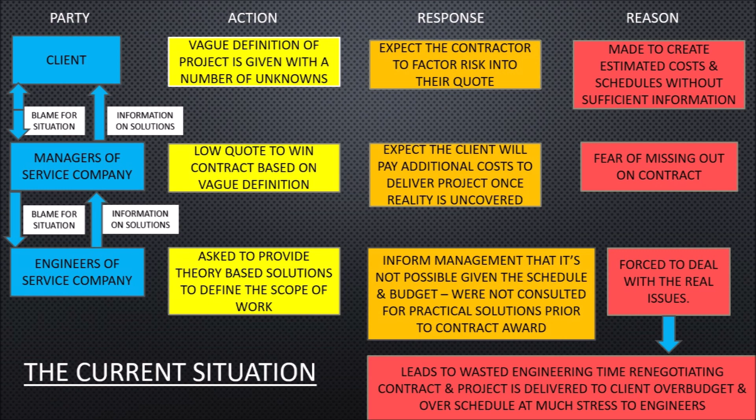We'd like to see this change, and as a result have developed a lean method of work which defines the technical scope of work at concept to deliver projects to realistic time and cost estimates. Scopes of work are based on practical solutions with construction build sequences. This requires more time in the first phase to correctly document locations of equipment, space required, and any practical issues to deal with in order to enable the works.

These details are necessary to pin down the scope of work and enable early engagement of suppliers for confirmation of equipment specifications. This method of taking extra time to work on these issues early vastly reduces the need for redesign and associated time delays later, making the following phases of work more efficient and less stressful.

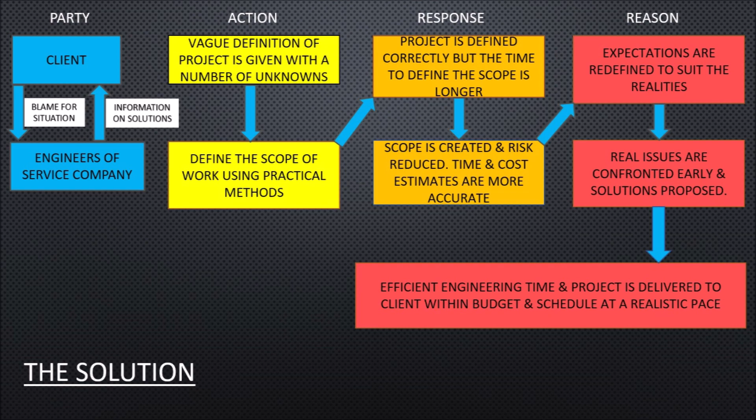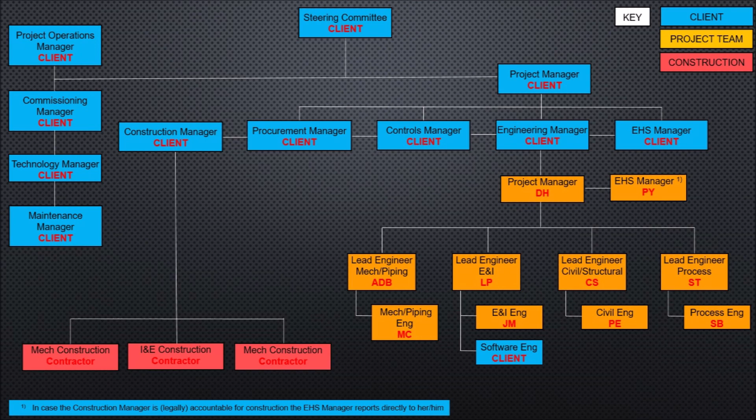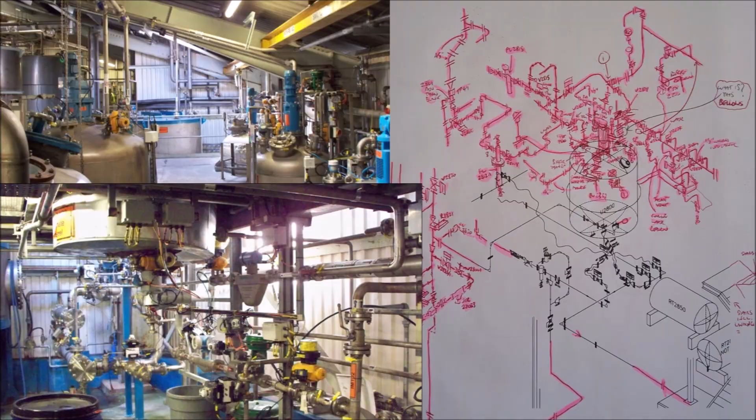Method of work. Phase 1. Concept or front-end engineering design. The most efficient method of working is to form a team which incorporates into the client's structure to make use of their on-site knowledge. Following surveys of the existing areas and equipment, isometric layouts are created. Proposed locations of equipment with physical sizes are added to the layouts, enabling the basic process calculations and other discipline parameters to be defined.

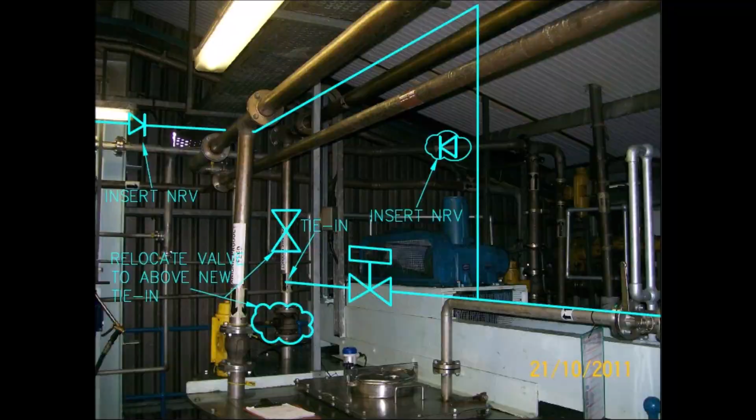For brownfield site surveys, the identification of existing services for extension, including power supply and instrument air, are also recorded. The physical representation of real-world information is incorporated into the initial design, forcing early solutions. This information enhances the understanding of work required for more practical process logic diagrams and written descriptions of the scope of work to outline stages of work in order.

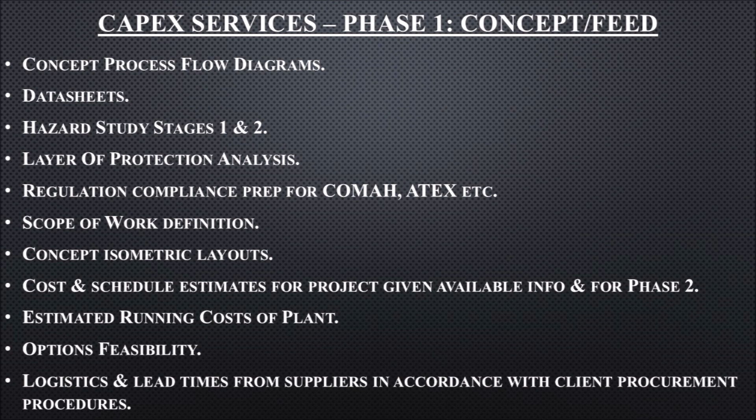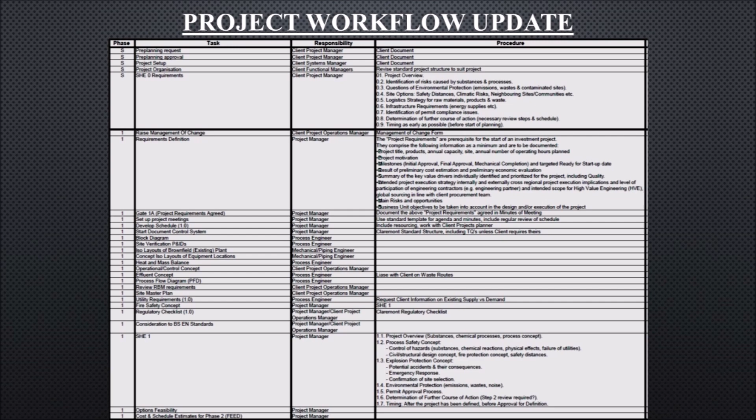The end of this phase produces a pack with technical information, layouts and process flow diagrams, along with time schedules and costs, to 30% accuracy given the available information and estimates of Phase 2. Design. Upon agreement of cost, scope and time schedules, the project workflow is tailored to suit project specifics. Building on Phase 1, the engineers advance the content to narrow the scope of work.

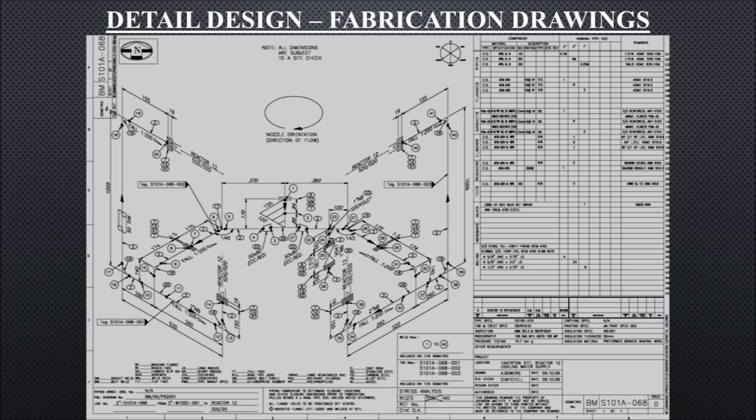These higher level details assist layouts, the construction sequence and P&ID process reviews, along with practical fabrication and installation information. Each discipline combines their work to produce equipment datasheets along with the mechanical, electrical and instrument contracts for the suppliers.

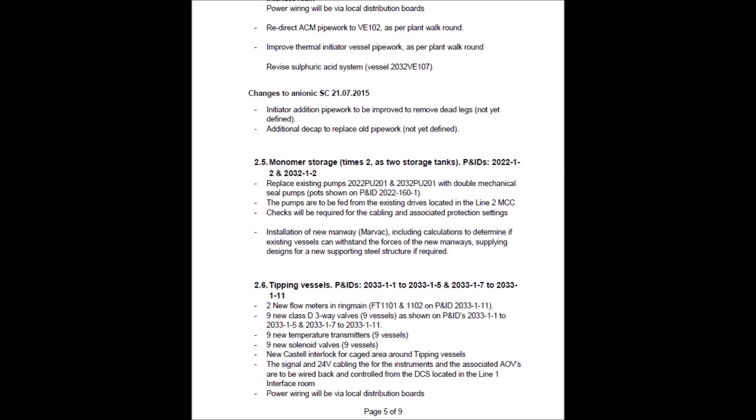The quotes from suppliers and construction contractors are more accurate as the scopes of work refer to the practical layouts, which are in the visual language required to understand the build, so construction issues are raised and dealt with as early as possible. The construction contractors competitively bid after a site walkdown. These quotes are compared in a technical bonus malus to select the suppliers, then costs and schedules updated to suit the realistic lead times and orders are placed.

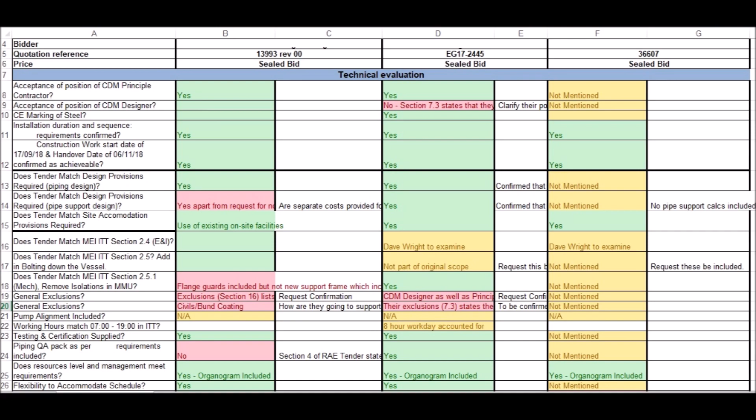A 3D model can be created if required, but the use is limited to show locations of equipment for layout reviews, clash checking in congested areas, reassurance to client of progress and volume calculations. They are of almost no practical use to the construction team at the workface, so unless the client requests a model, there is a threshold to pass to justify this creation.

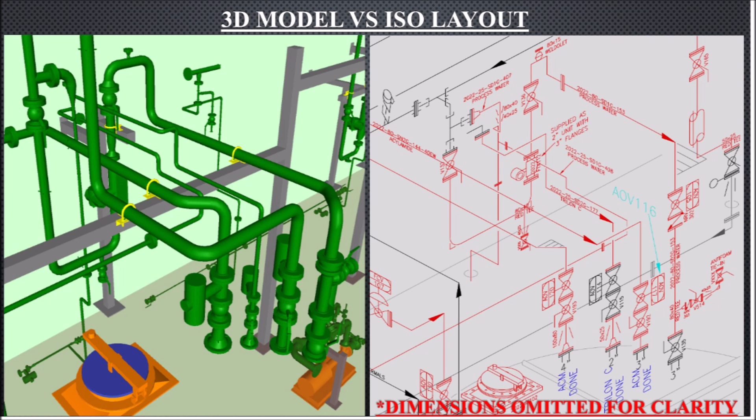The model also does not show which services the pipes carry, tag references of inline equipment, or even pipe size and spec, with the user having to refer to multiple other documents for this data, whereas our ISO layouts contain all information for easy construction, making reference to P&IDs and fabrication drawings much easier. The construction contractors use the ISO layout in favour of the model during this build.

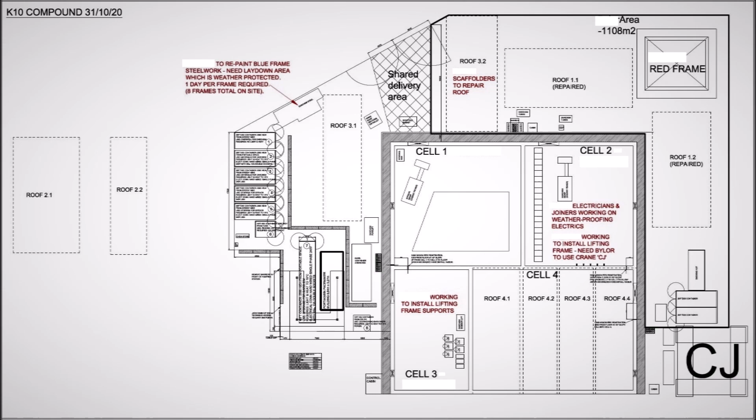Once all documents are complete for Phase 2, we're ready for Phase 3, site works. The layouts are used to communicate all construction activities, from bringing contractors onto site and setting up the compound to laydown areas, showing step-by-step movements for each party to coordinate work required. Work starts after pre-task meetings to walk through the construction sequence with all required parties.

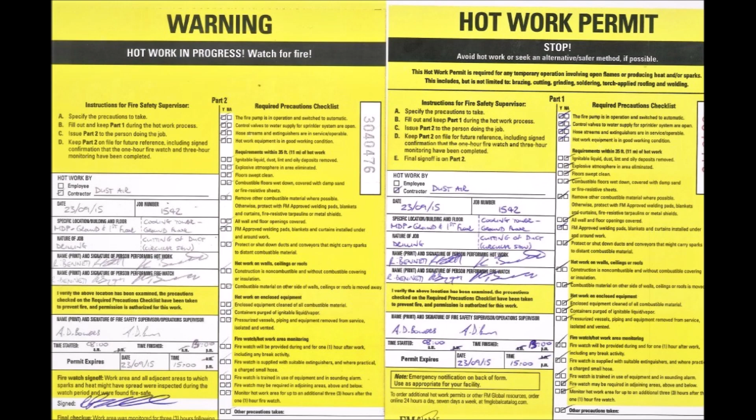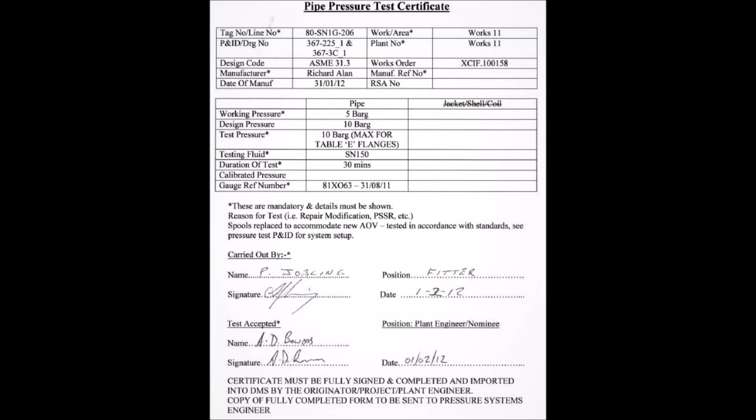Once permits are signed and work commences, the contractors are guided by continuous engagement, which includes audits, problem-solving on-site issues, including management of change, and contract conflict resolution. As work progresses, the layouts are updated to show as-built progress, recording of snags and commissioning activities before work areas are signed back over to plant control once complete.

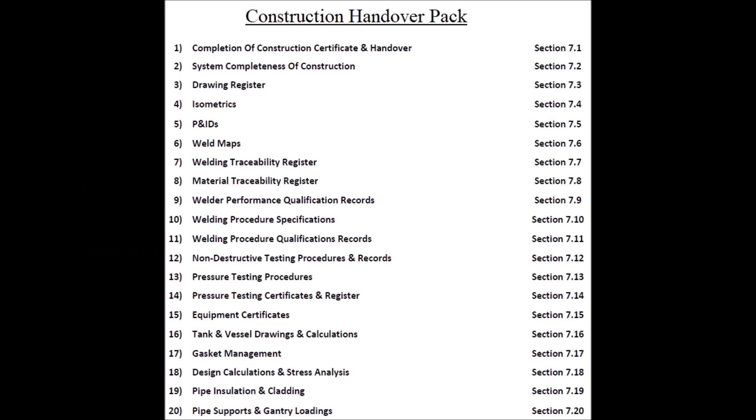When the construction phase is finalised, move on to Phase 4, post-works. As-built information from the contractor is used to update P&IDs and layouts, then incorporated into the project handover pack. Other activities to close a project can include HAZOP 4 to confirm all requirements are met, creation of operating procedures, maintenance requirements of new systems, and technical support for any reliability issues. Finally, lessons learned will be carried out to identify improvements we can make in delivering future projects.

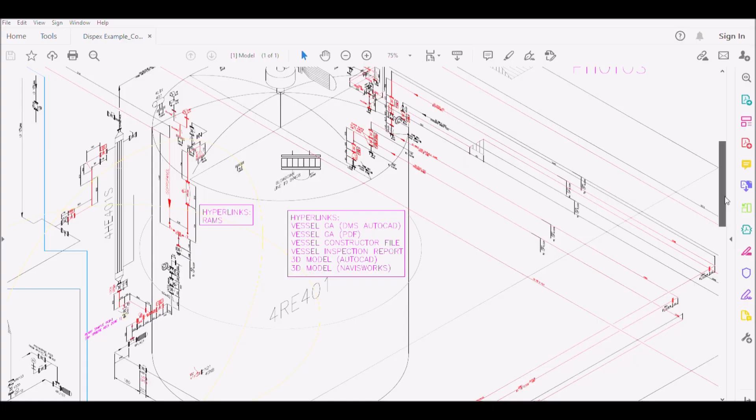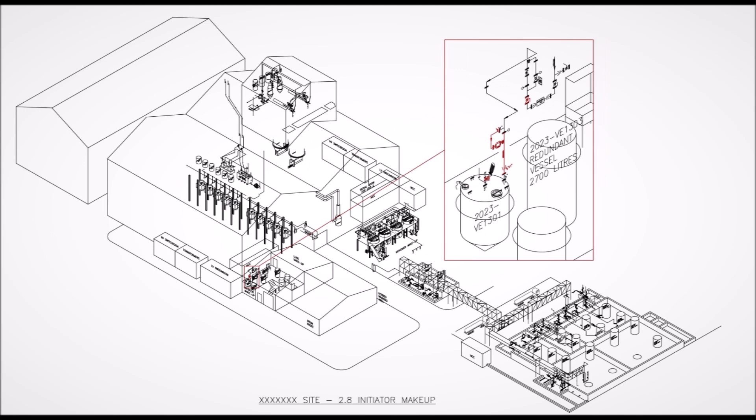The end of the project produces an as-built interactive pack which can be used for all future works. Any and all documents can be hyperlinked on P&IDs and layouts, making tasks faster and easier. Over time, the projects undertaken build up a more complete picture of the site, so that projects pay for the update of full site records. This built-up site layout with fast access to documents also assists with services for maintenance, reliability and EHS issues.

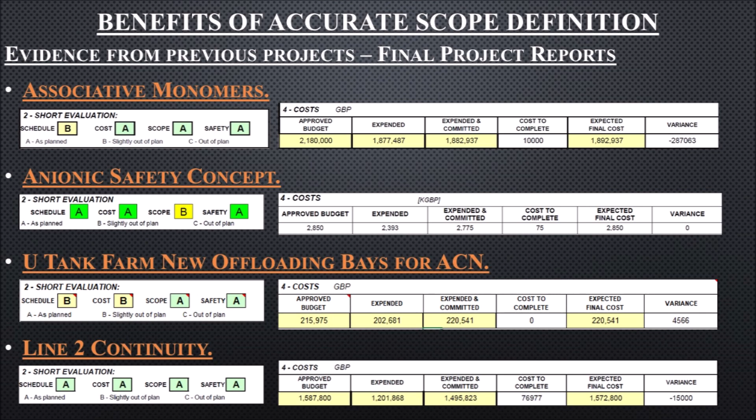Evidence that this method results in delivery of projects on time and within budget is presented here, with 4 recent projects all delivered within time, cost, scope and safety plans. For details of projects worked on, please see other presentations.

In order to enable a successful project delivery, here's what we cannot do. We cannot go back in time and change an agreed contract with suppliers. Starting work to then go back and redefine a project scope while the work is already ongoing, while also trying to define the next phase of work, is very high pressure and stress. This results in items being missed and mistakes made.